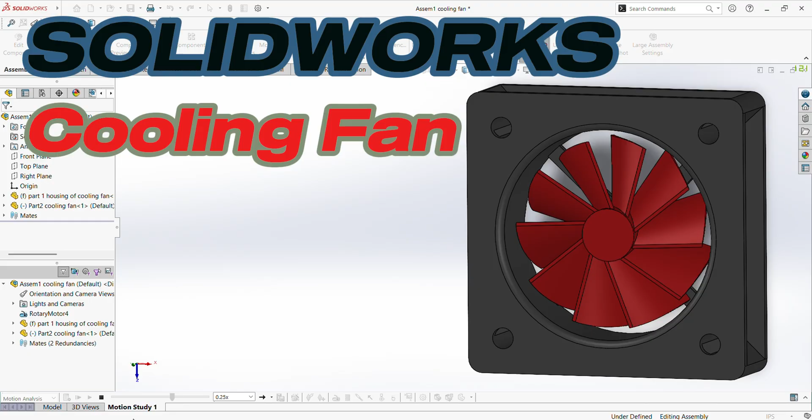First of all, we select the top plane. First we will select the unit, so millimeter will be the unit. Now select the top plane and sketch it. Select the center rectangle, click at the rectangle center, and draw a rectangle.

Select this edge. Select one edge, plus control, plus the second edge, so it should be equal size. Click OK, then select the dimension.

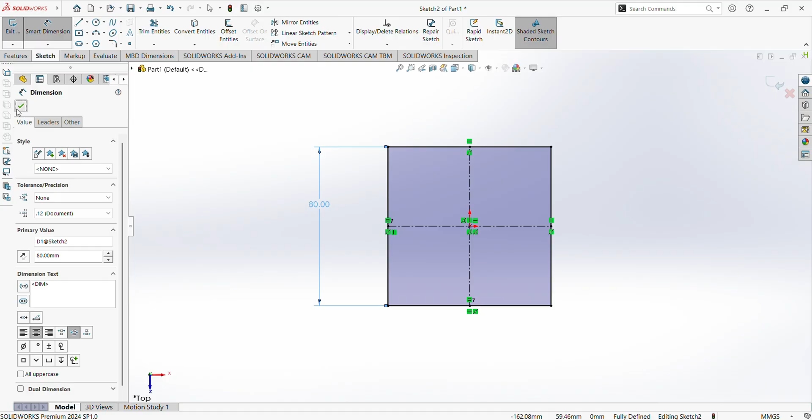The dimension of this side should be 80 mm, only 80 mm. Now select the circle, select at the center.

This should be of diameter 60 mm. Now select the feature, go to extrude boss, and this width should be 10 mm.

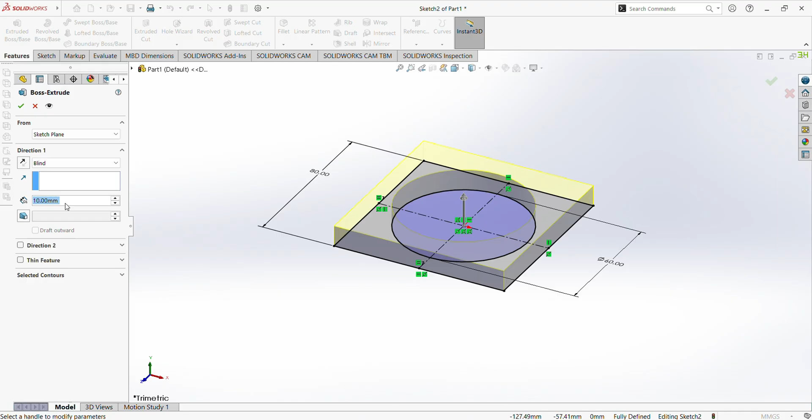Now we have to make a plane at the center, so select the reference plane, and the reference should be first this side. Flip it, 40 mm, okay, here we got a plane.

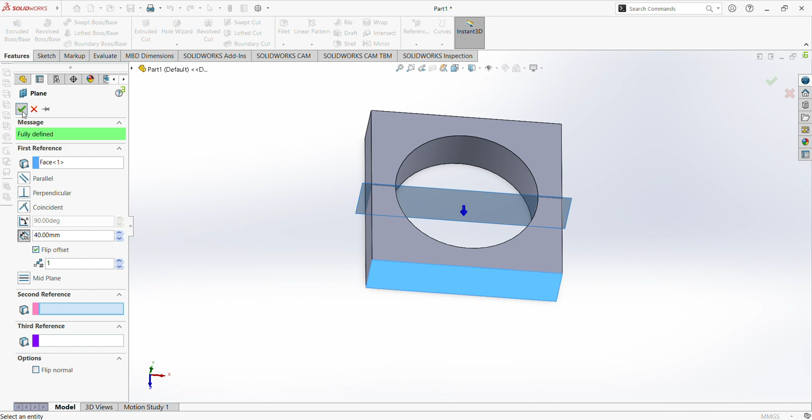Select here. Now we have to make some 2D figure here, so select the line and make a line like this.

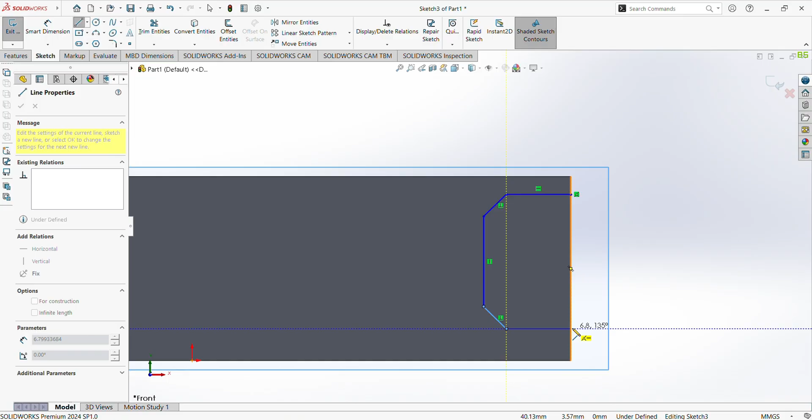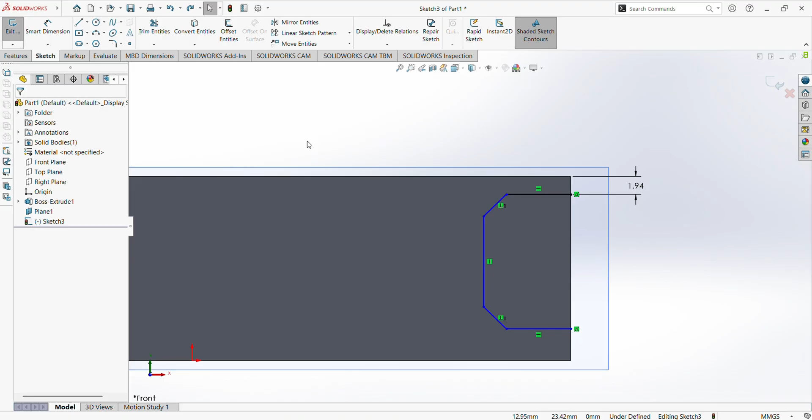Okay, so we have to dimension this line. The length between this should be 2 mm, and here again 2 mm. Dimension, click here, and this should also be 2 mm.

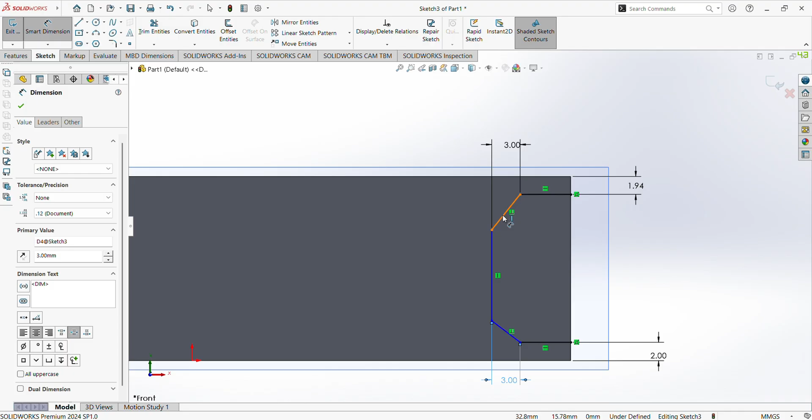Between this point and this point should be 3 mm. Fine, and the angle between these should be 135 degrees. Okay, so here we got the desired figure.

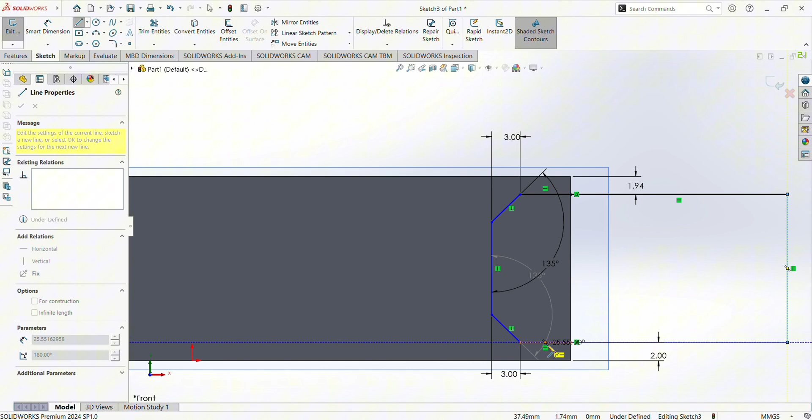Select line again and extend this. Again we have to select a center line here, so select at the center and make a construction line.

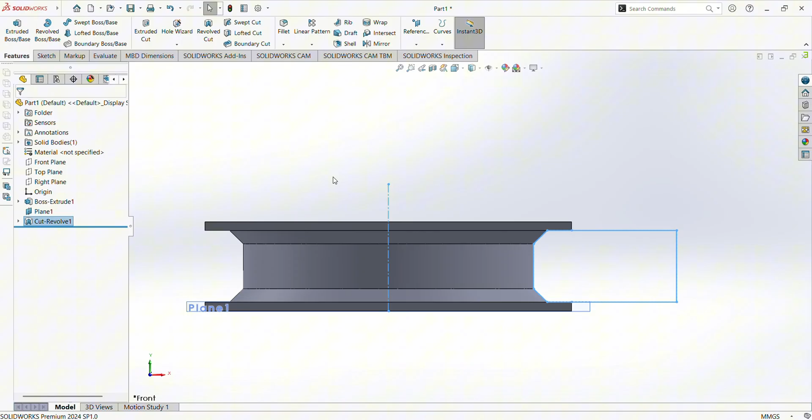So here we go to feature, revolve cut. Select OK. So we got this figure, this 2D to 3D model.

So again we have to make a screw hole. Select here and sketch the plane. First of all, hide this plane. Okay, so hide this plane.

Select the circle and draw a circle here. The dimension of this circle should be diameter 6 mm. Okay, 6 mm is good, and the distance between this circle and the edge should be 10 mm, from here to here it should also be 10 mm. So it's between this.

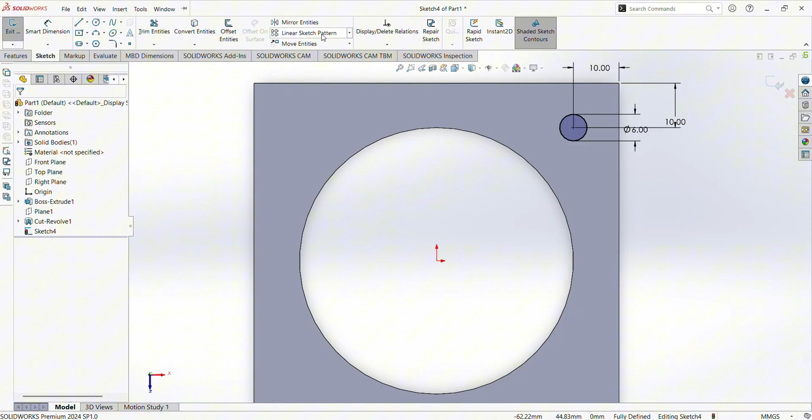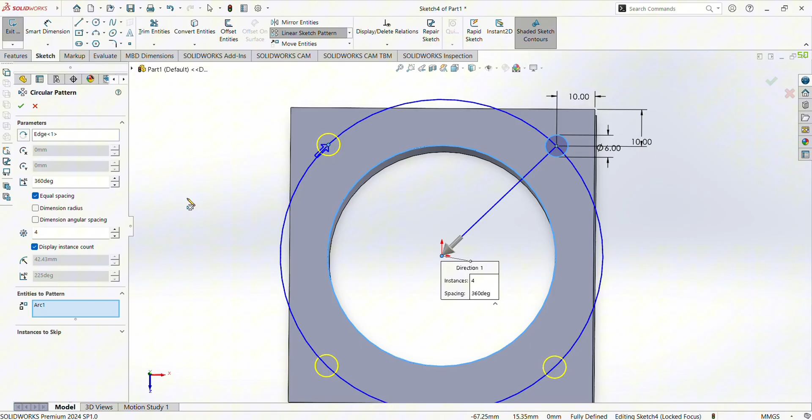Now select the linear sketch pattern, click the circular sketch pattern, and select the parameter here. First select the entities to pattern, so we will select this. Okay, the parameter should be, yes, we want 4. So select the feature, extruded cut, and it will be cut on both sides.

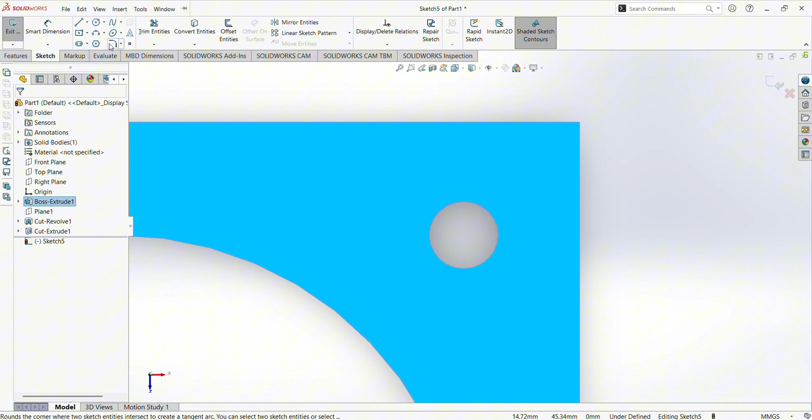Again select here, sketch, and make a fillet here. First of all, click convert entities, convert entities, so select here, fillet. It should be 6 mm, or 4 mm. Okay, 4 mm is better.

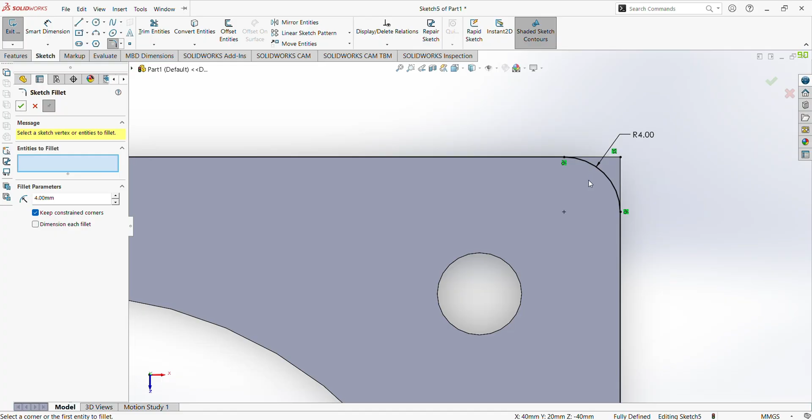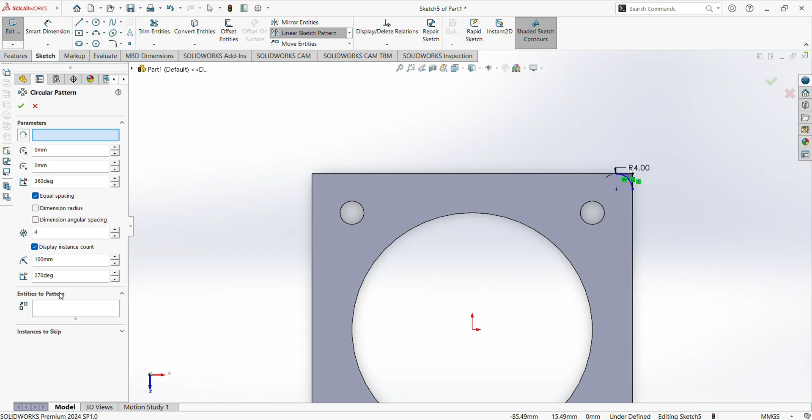Select a sketch line, click here. Trim entities. So again we will select the linear pattern, circular pattern, and select the entities to pattern. It should be up to these lines. Go to feature, extruded cut. Okay, so now it's filleted at the corners.

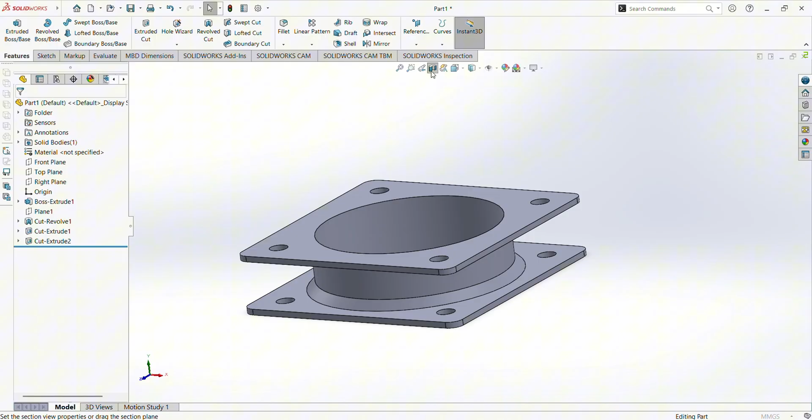Now we have to make a support here. First of all we'll convert this to section view. Sketch this. Click at the line.

First of all we will click the circle, convert entities, click on the line. So again we will first select this and convert entities. So here again, select the line.

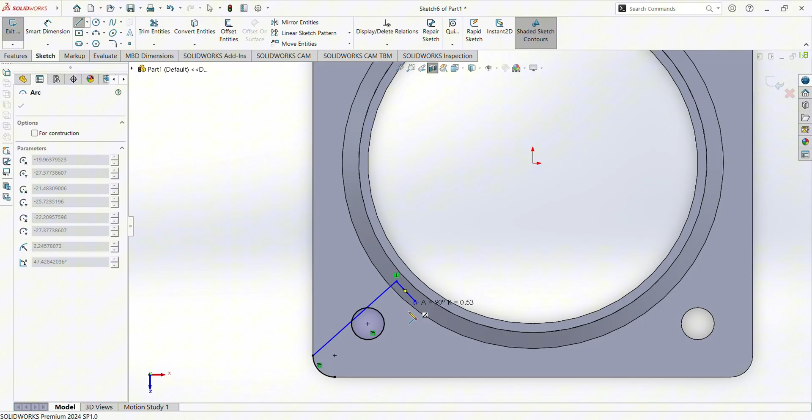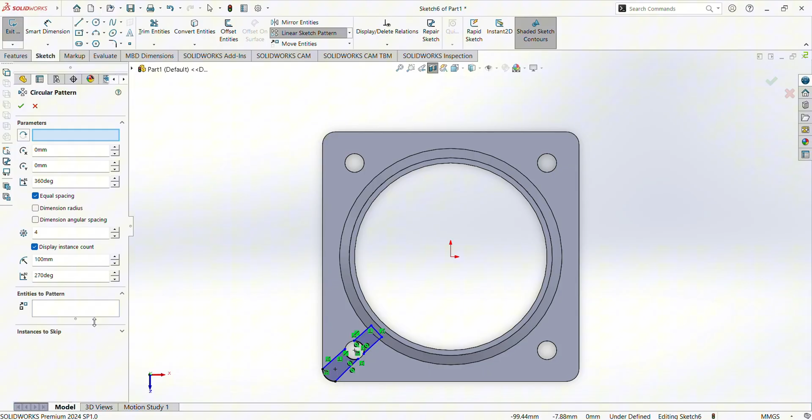Select here, trim entities. Fine. Now again we have to select the linear sketch pattern, circular sketch pattern, and select the pattern lines. Okay, we got the actual pattern. Now go to feature and extruded boss, and it should be up to next.

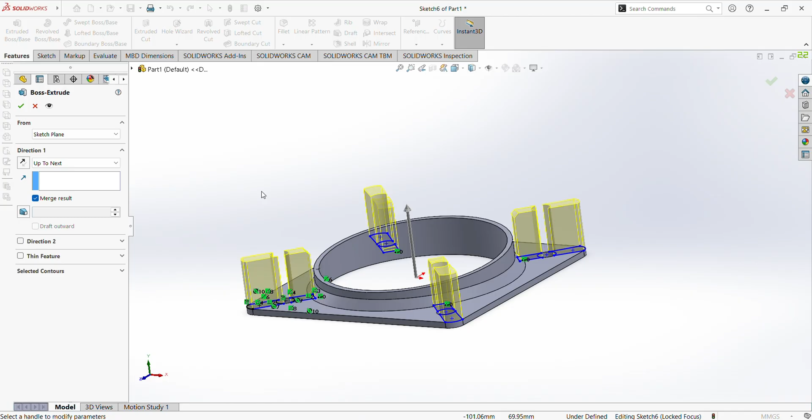Now we have to view the full section. So this is the supporting.

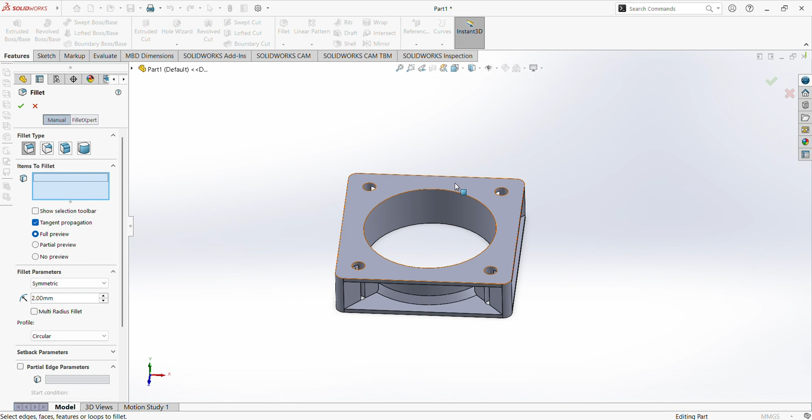Now we have to select the fillet here. To fillet this, select fillet. It should be 2 mm. Select the edge, first this one, and this all.

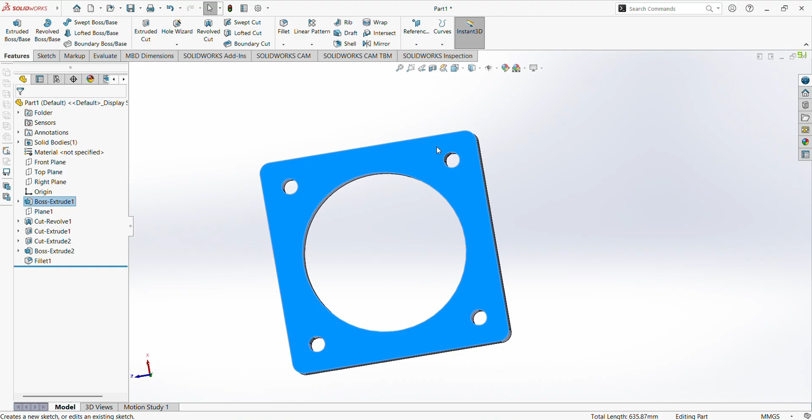So at the back side we have to make a support here for the motor. Select this sketch again, click at the circle. Make a circle of 15 mm. First dimension this circle, this will be 15 mm. Now again select the line, it should be like this.

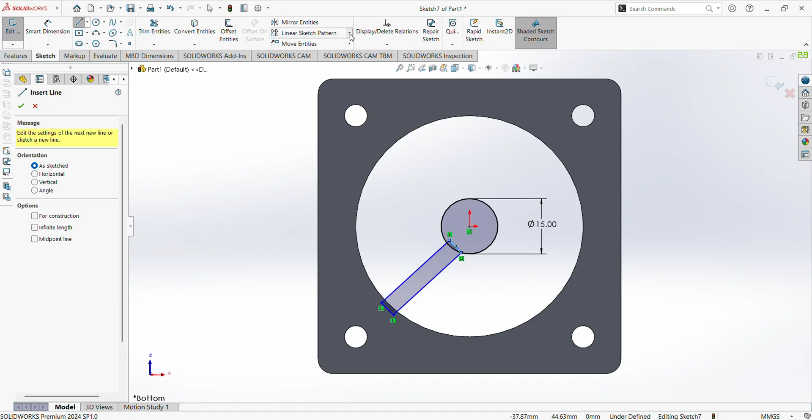Again select the linear pattern, circular, line 4, so select the whole line. Click. Now select the trim entities to complete the proper figure, and trim the unwanted lines.

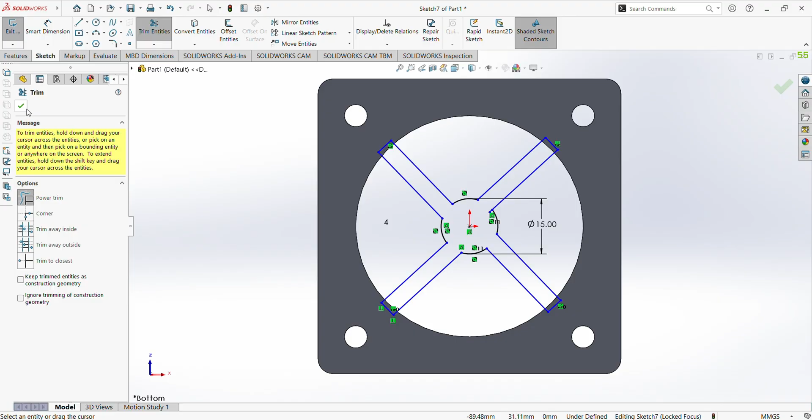Now go to feature and extruded boss. It should be of 2 mm, so select here 2 mm, and it should be of another direction. So this is the good direction. Okay, select.

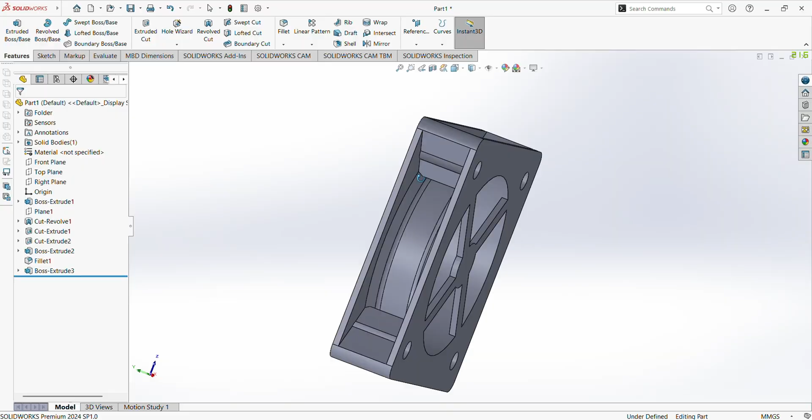So we got the housing of the cooling fan. This is the housing.

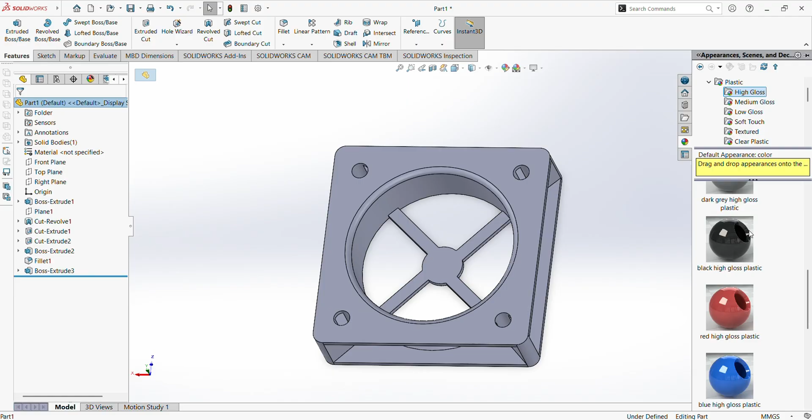Now we will select the material, select the part, go to appearance, it should be of plastic. Select plastic, high gloss, and it should be of black. Not fully black, it should be some grays.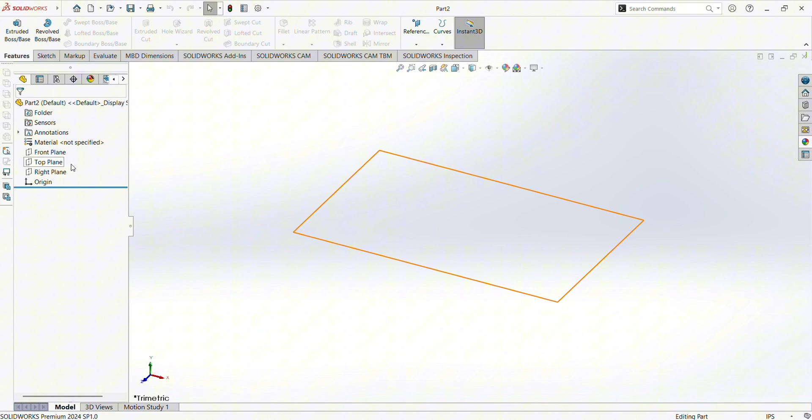So now we have to make a second part of the cooling fan. The second part is a fan. Select the, first of all select the millimeter. Here top plane, sketch it.

Now draw a small circle. The dimension of the circle should be of 15 mm. Okay, and we will extrude this.

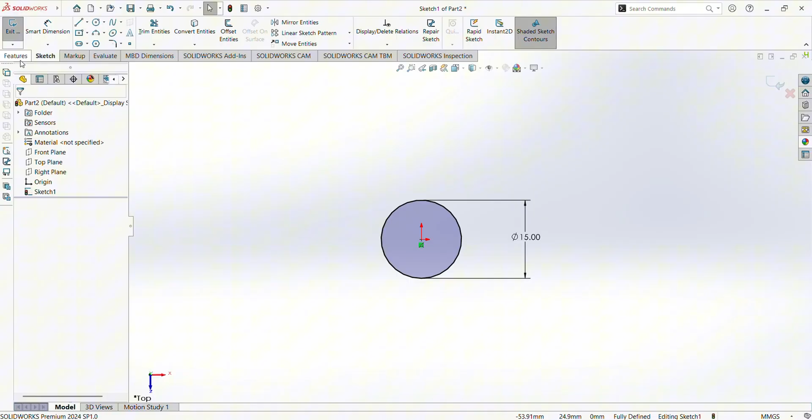Go to feature, extruded boss, and I think it should be of 16 mm. So 16 mm should be good.

Now here we have to make some multiple planes. So select the reference plane, select the reference, and it should be of distance 1 mm from this side.

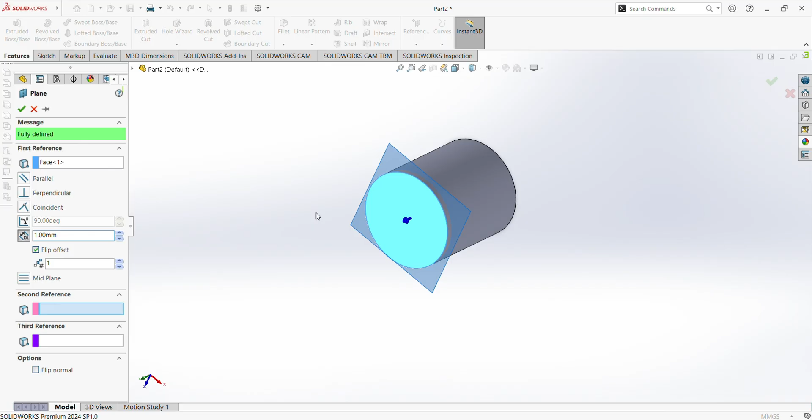Select the another plane, select here, and the reference will be of this side. Again select the reference plane, this side the reference, flip from 1 mm.

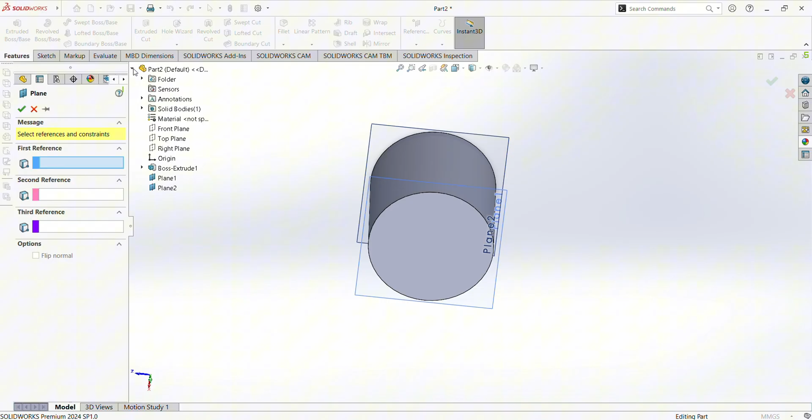Okay, again we have to make a third plane. So select here the plane, select here the reference. First of all cut it, reference and plane should be from right side or front side. Front side is better, and it should be of 30 mm distance.

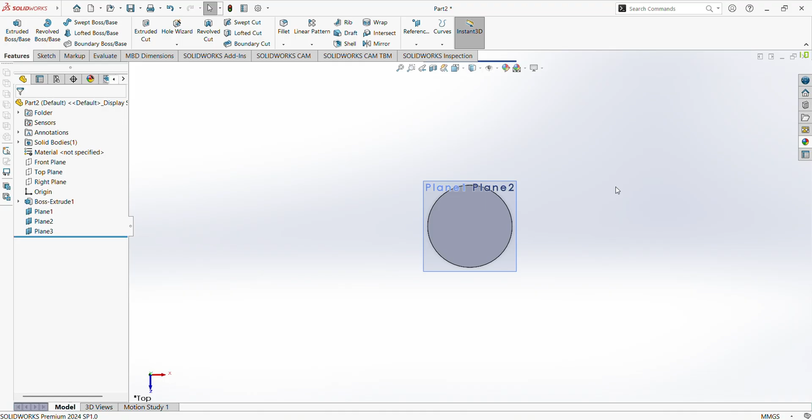So we got the proper planes. Select the first plane, sketch it. So we have to select the plane first plane. Sketch.

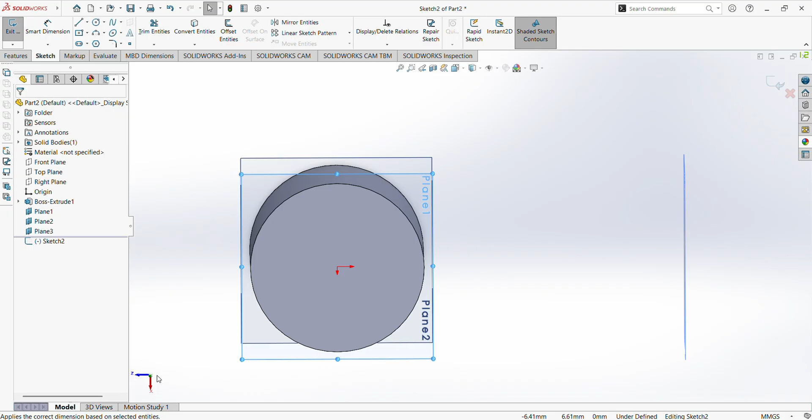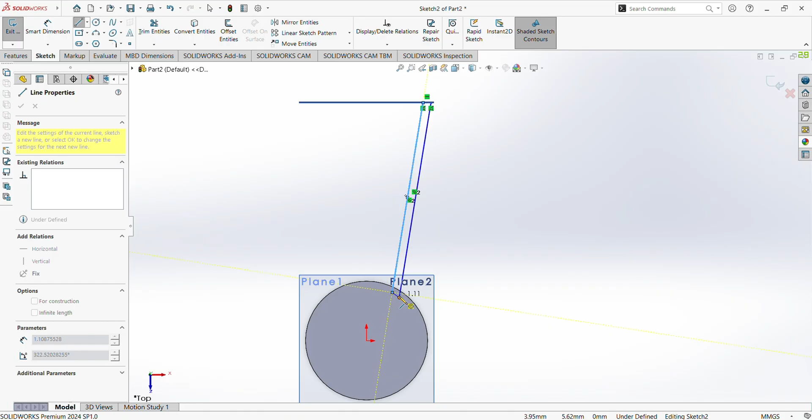Select line, and here it should be like this.

Second plane, sketch. Select the line, it should be like this.

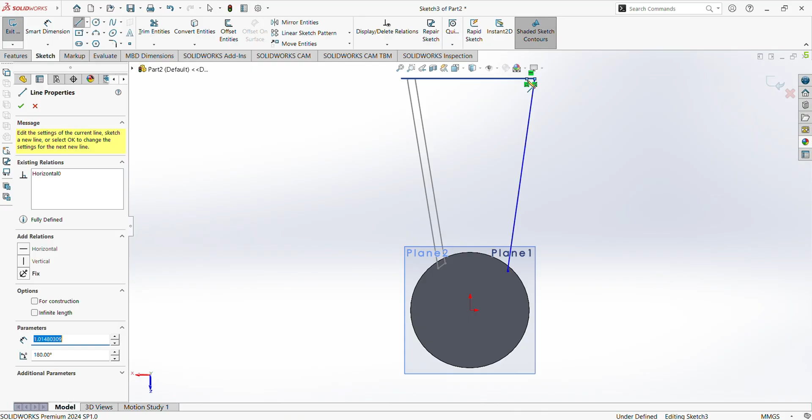Go to the third plane, sketch, and here select the spline, this point, this point, and this.

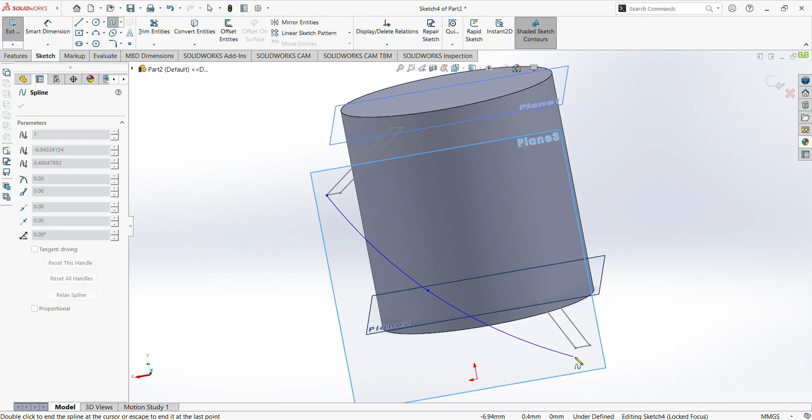Okay, go to the feature. First of all, exit. Go to feature lofted boss. So select here the path, and the profile should be like from here to here.

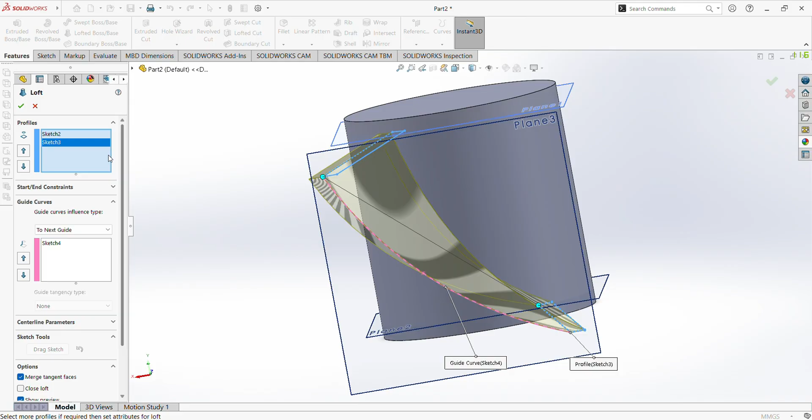Select this point, so it should be like this to this point. Okay, let's go.

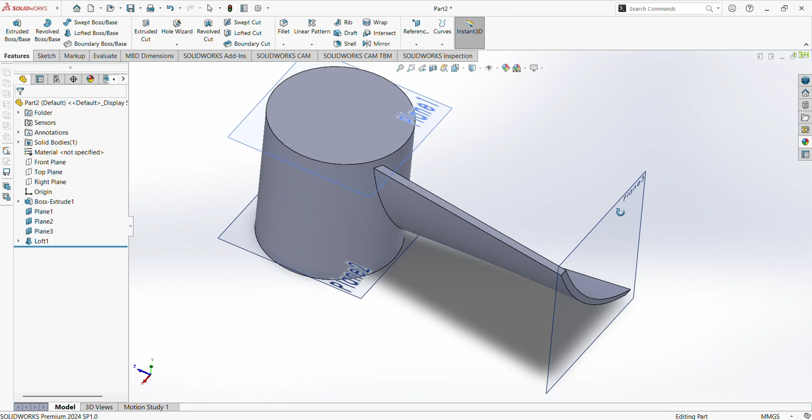Now, first of all, we will hide the all planes. No, no, first select the plane first. Again, draw a large circle from this origin like this. Okay, and select the line.

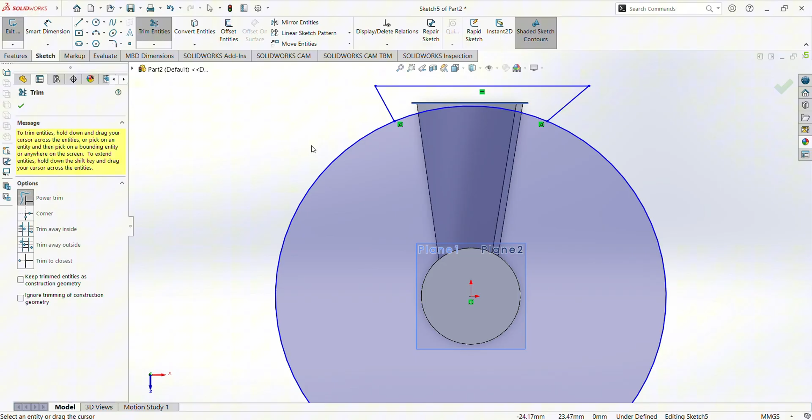Click here, here, and here. Select the trim entities. Exit. Now we have to shape this fins like a circle.

So select the features. Extruded cut.

Now we have to hide all the planes. So hide it.

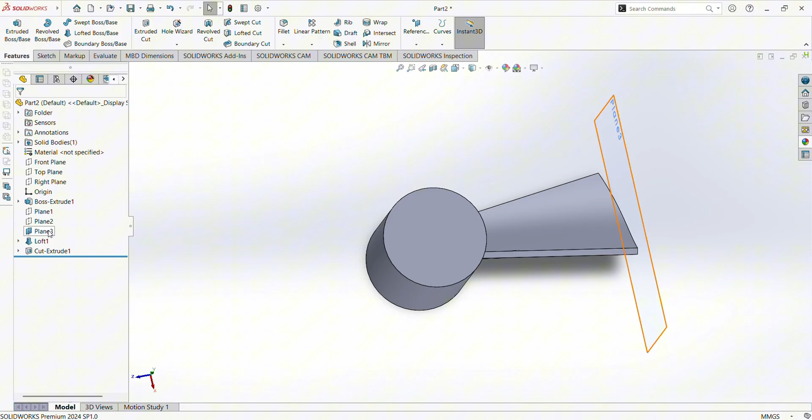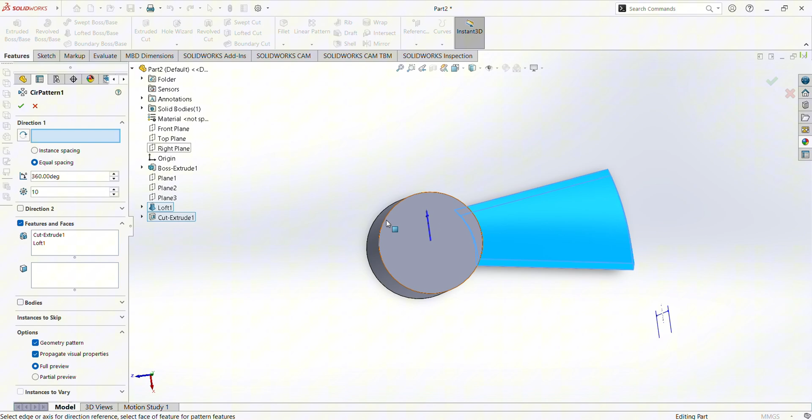Now we have to make multiple fins like this. So select here linear pattern, circle pattern, and select here the loft tool. The lofted fins, and click here the base. So this should be the axis, and numbers of fins should be of, okay, 10 is good. So this is a fin.

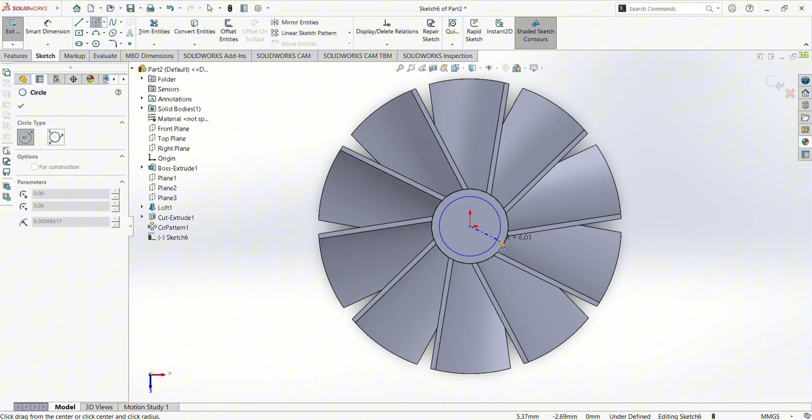Here we will select the base of this circle and create a small circle here. So it should be like, okay, 6. Click here the feature extruded cut, 14 mm, 14 mm. So this is the base.

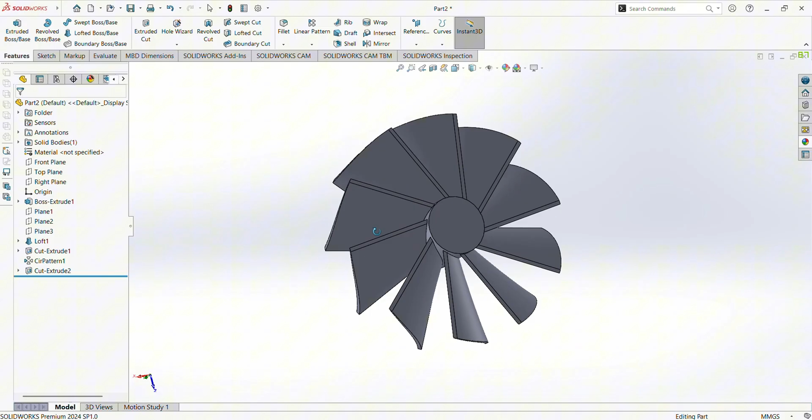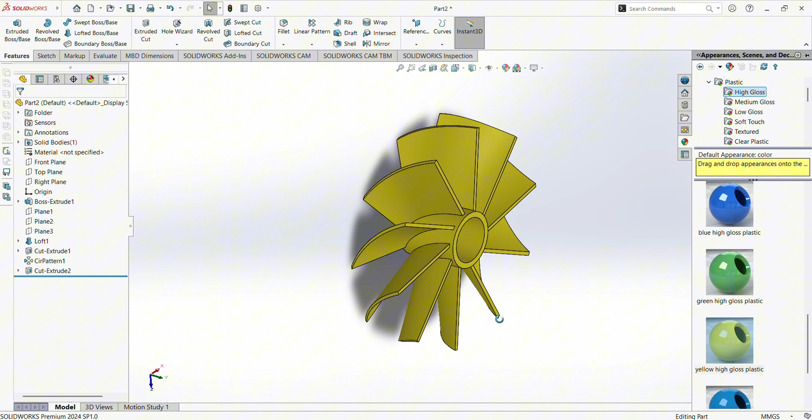Now select the part and specify the material. So select here the appearance. It should be of plastic, high gloss, and red, blue. Oh, yellow. Okay, red is better. So this is it, now we are going to save it.

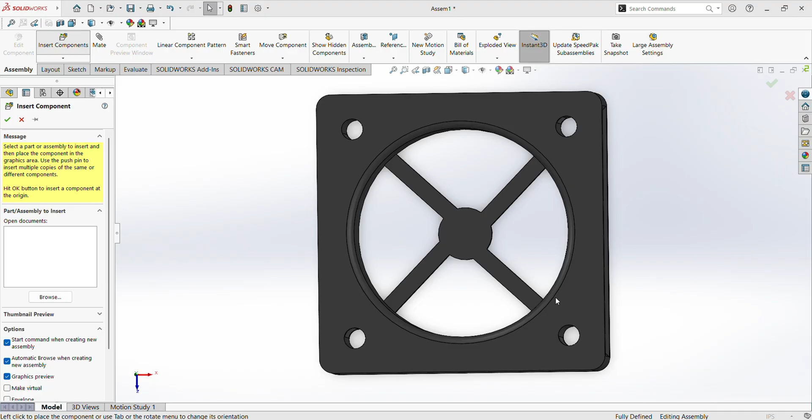So now we are going to select a new file, and here we will set assembly. Now we will import the housing, housing of cooling fan. Select here. Now we will again import one file, that is of cooling fan. So it should be here.

Now select the layout, click this movement of component, select here, rotate the component. First of all, select this component, move the, select here, rotate component. Okay, that's fine.

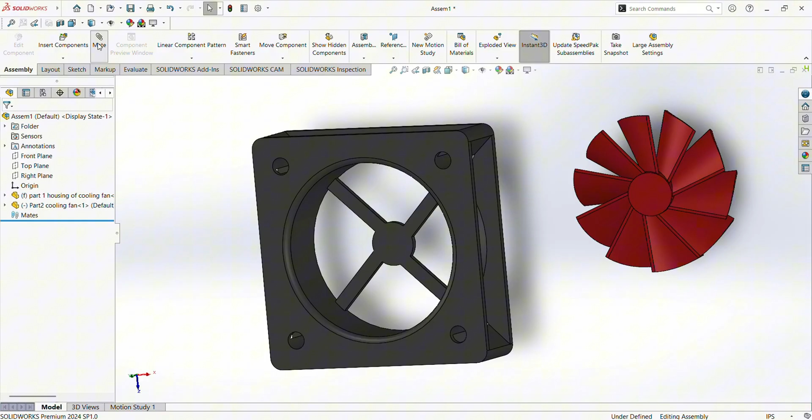Now here we will apply the mate. So select the assembly and click on the mate. Here we will select this part and this part. Okay, this is good.

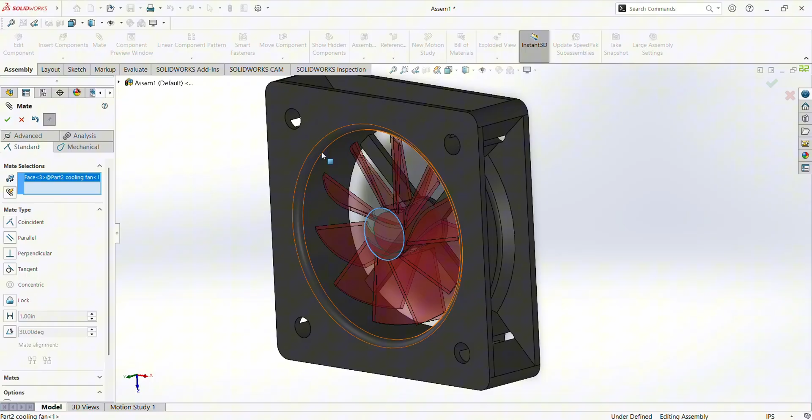Now again we will do the mate. We will select this face and this face. Okay, this is done.

In this now we will put some motion. So for this, first we will select the motion study. Here we will select the motion analysis, and now we will select here the motor. So this is a motor symbol.

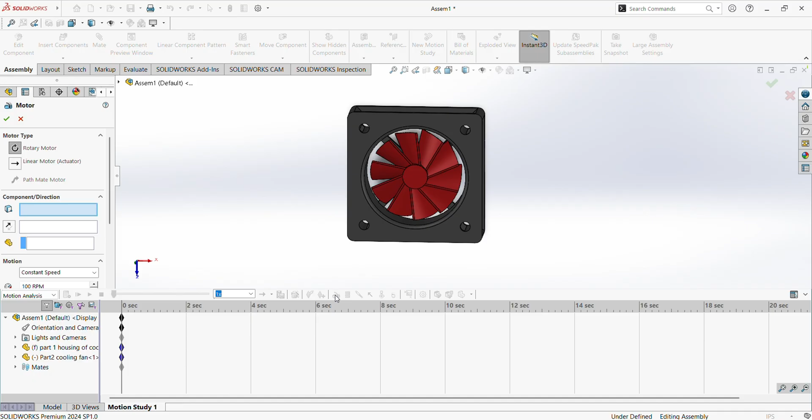Click here and select the component. So this is direction of motion. So put this. Okay, done.

This is a final view of a cooling fan in a Solidworks.